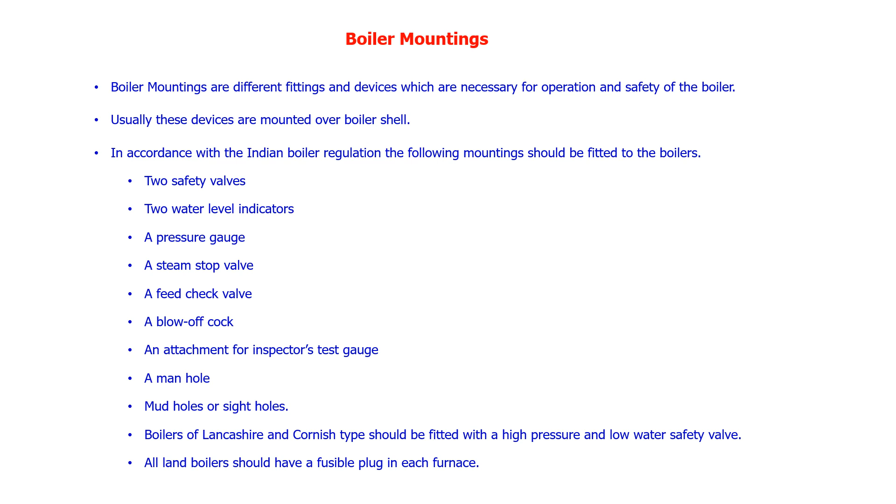Here we are going to see a few important boiler mountings. This one is the water level indicator. In many places we are finding the application of the water level indicator. It will work on the principle of Bernoulli's theorem. Whatever the water inside the shell, that will be reflected outside in the glass tube. So we can monitor what the water level is.

So we have to maintain a good water level. Otherwise, the boiler will not function, the heat generated will be wasted, and it will affect the boiler tubes. Without water, if the boiler tubes are heated, the tubes will be damaged. So the water level indicator is an important device fitted over the boiler shell, to know the water level inside the boiler. It is working on the principle of Bernoulli's theorem.

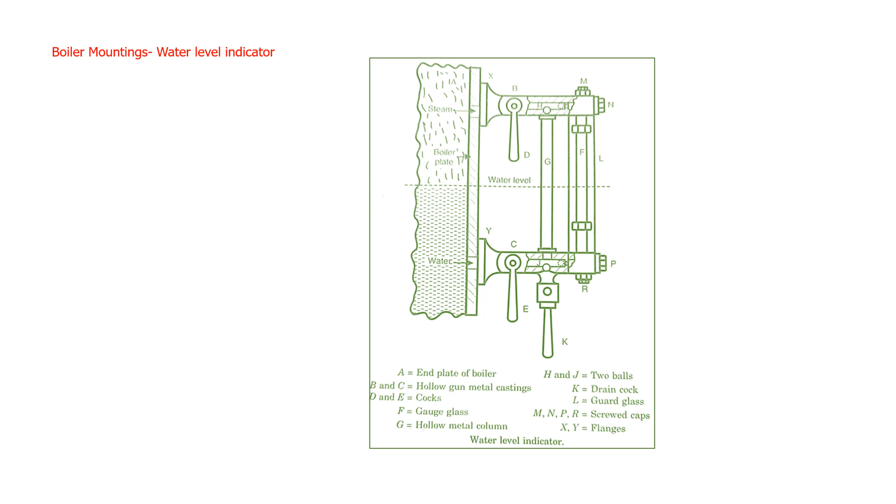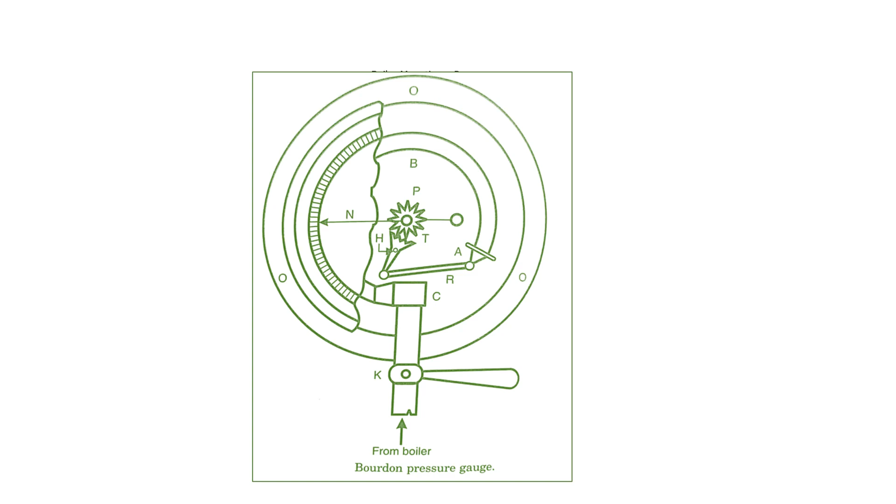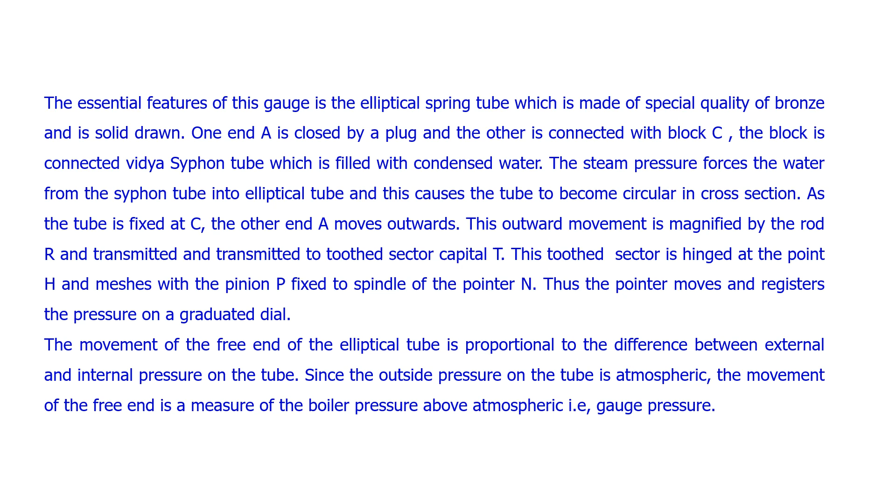It is connected with a siphon tube which is filled with condensed water. The steam pressure forces the water from the siphon tube into the elliptical tube, and this causes the elliptical cross section to become circular in cross section. As the tube is fixed at C, the other end A moves outwards. The outward movement is magnified by the rod R and transmitted to the toothed sector pinion gear arrangement. The toothed sector is hinged at a point H and meshes with the pinion P, fixed to the spindle of the pointer N. Thus the pointer moves and registers the pressure on a graduated dial. This is the working principle of the Bourdon pressure gauge.

Another important boiler mounting is the safety valve. The function of the safety valve is to release the excess steam when the pressure of the steam inside the boiler exceeds the rated pressure. Like in houses we have the rice cooker. When the pressure inside the rice cooker increases, the safety valve fitted over the lid of the cooker will burst out, without any damage to the cooker or to the equipment surrounding the cooker in the kitchen.

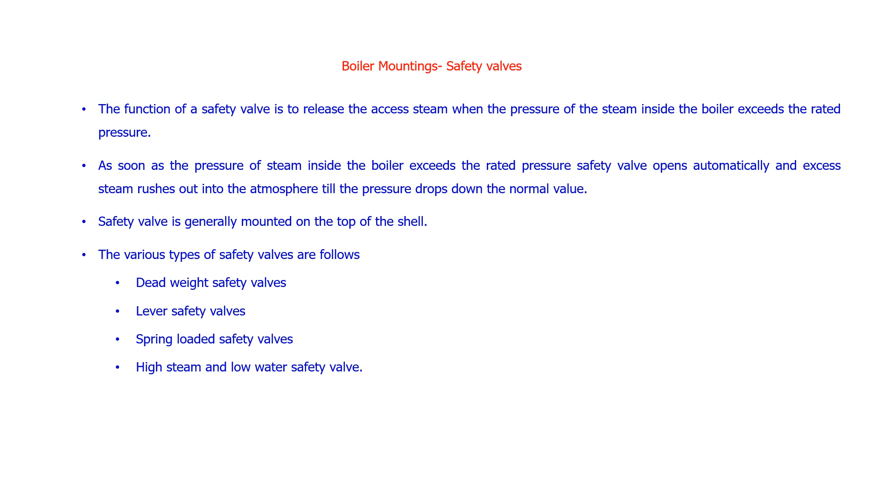As soon as the pressure of the steam inside the boiler exceeds the rated pressure, it will automatically release the excess pressure and it will control the pressure inside the boiler shell. It is fitted on the top of the shell. There are different types of safety valves: deadweight safety valve, lever safety valve, spring loaded safety valve, and high steam low water safety valve.

Third important boiler mounting is a fusible plug. The fusible plug will start melting if the temperature goes beyond the critical temperature, so it does not cause any damage to the boiler. That's why it is called a fusible plug. When it starts melting, the steam will come out and the boiler furnace and grate, everything will be safeguarded. This is another important device fitted as a boiler mounting, called a fusible plug.

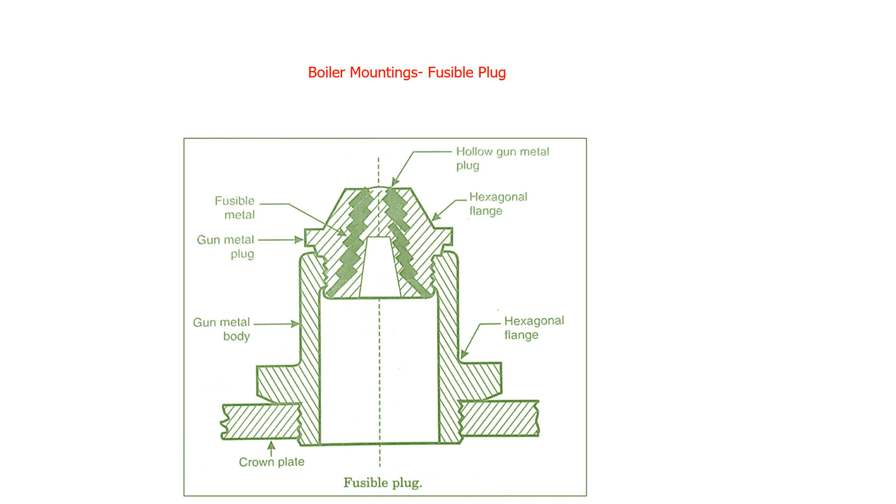Coming to the boiler accessories, these are auxiliary devices. It's not mandatory, but almost all boilers have these accessories fitted to increase the efficiency of the boiler and for proper functioning of the boiler. The boiler accessories are extra fittings to increase the efficiency of the boiler and maintain its proper functioning. Commonly used boiler accessories are feed pump, injector, economizer, air preheater, superheater, steam separator and steam trap. Economizer and air preheater are the important boiler accessories fitted to boilers.

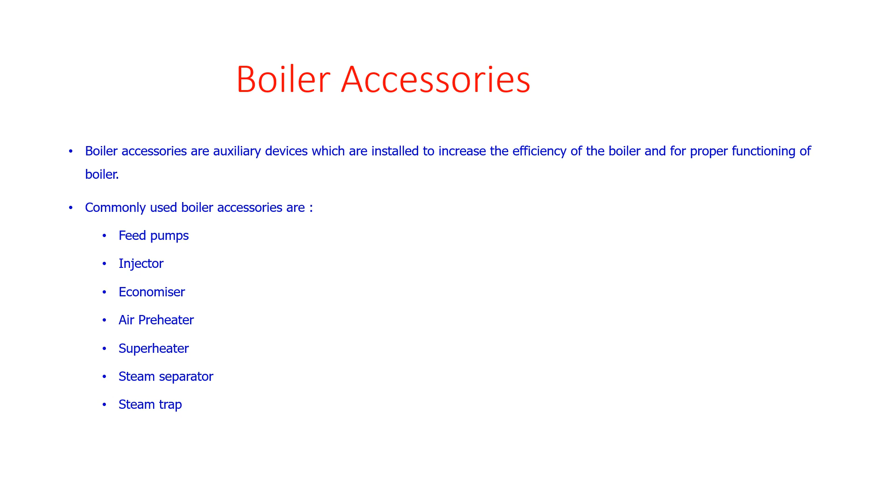When we supply preheated water instead of normal feed water, fuel consumption will be reduced so that we can have increased efficiency. That is the concept behind this. We utilize the waste heat to heat the incoming water. That is called economizer. The flue gas is circulated over the water tubes, the water inside the tubes gets heated up, and the hot water is circulated through the boiler drum.

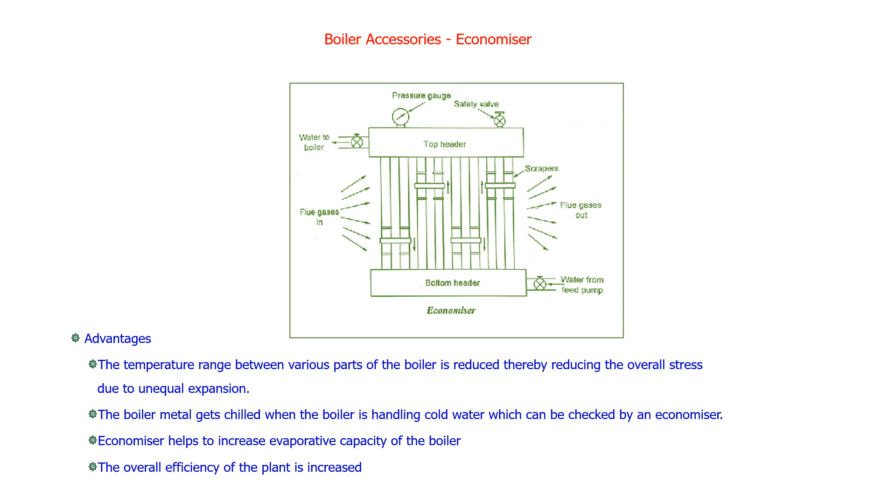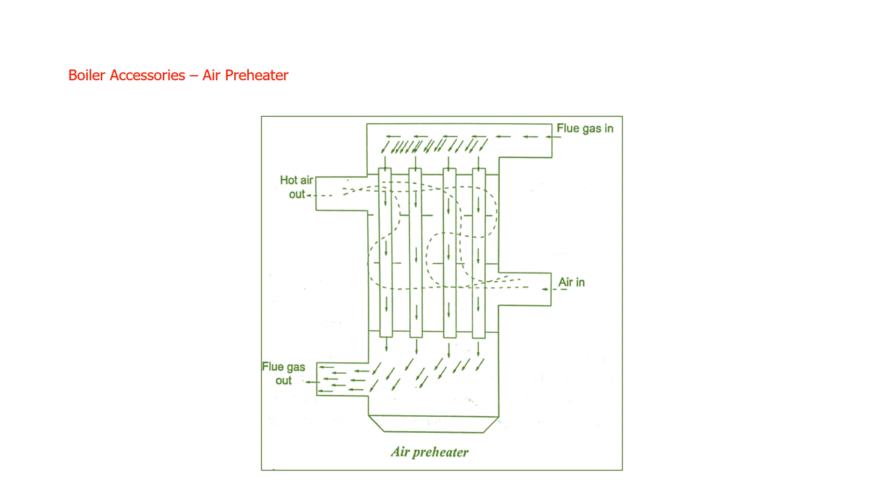Next is the air preheater. This is also based on a similar concept. Before letting the flue gases to the exhaust chimney, we utilize the hot flue gases to preheat the air. Why do we have to preheat the air? The air is sent to the combustion chamber, that is the boiler furnace. If we supply hot air, it will speed up combustion. In less time, we can have a high amount of heat generation, which will be circulated over the boiler water tubes. That's why we preheat the air, to enhance the efficiency of the overall boiler plant.

So with this, we will close this video. In this video, we have seen boiler accessories and boiler mountings, which are essential for better and safe operation of a boiler power plant. Thank you for watching this video.